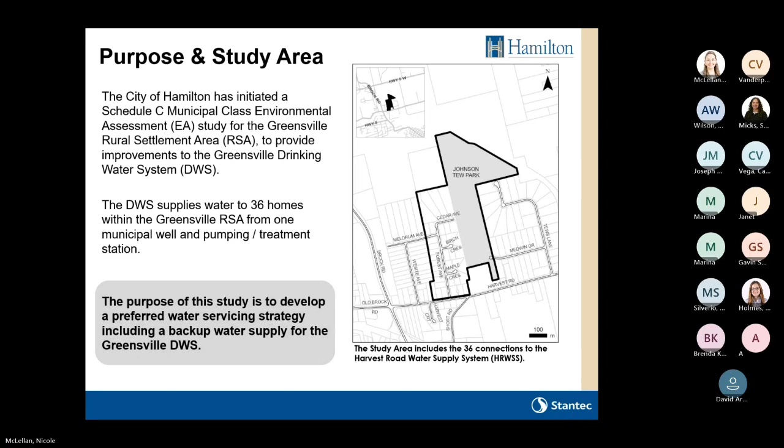The Municipal Class Environmental Assessment Study process frames the planning and implementation of municipal infrastructure and is legislated through the Ontario Environmental Assessment Act. This study is being conducted as a Schedule C project and will cover phases 1 through 4 of the EA process.

In phase 1 of the study, background planning and policy documents were reviewed, and the study area and problem and opportunity statement were developed. The project is currently in phase 2, where existing conditions have been detailed, alternatives have been identified and reviewed for their feasibility, and the recommended alternative solution has been identified, which will be presented today.

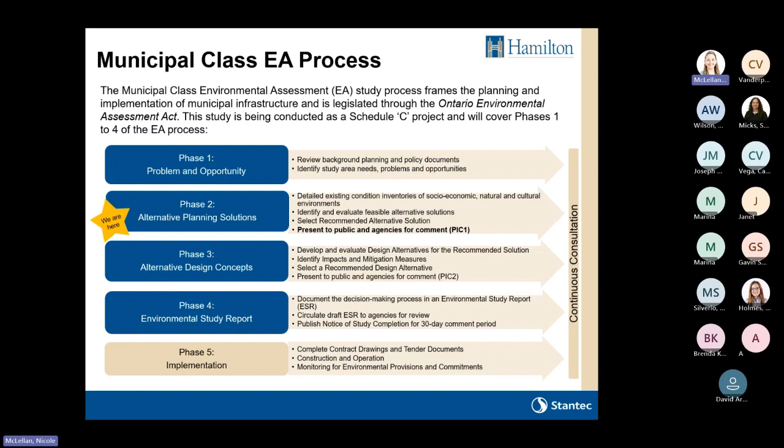Several previous studies have been completed and were used to inform this study. The Mid-Spencer Creek Greensville Rural Settlement Area Subwatershed Study was completed in 2016.

This study identified a management strategy for community servicing water and septic, recommending to maintain individual wells and septic systems on future lots, and to add a backup well to the existing supply well, FDG01, for the Greensville drinking water system. The location, sizing, and preliminary design of the treatment plant and storage tank would be subject to further assessment under a subsequent Schedule C Municipal Class EA.

Subsequently, a feasibility study was completed to identify potential backup well alternatives and explore cost implications associated with the 2016 subwatershed study recommendations. The feasibility study was initiated as a Schedule C Municipal Class EA. However, due to the identification of aging infrastructure at FDG01 and additional alternatives being identified, the EA was transitioned into a feasibility study.

The recommendation from the feasibility study was to implement a single well supply, or new well supply, with one fenced wellhead in Johnson Tew Park, installation of a well pump, transmission line, pumping control, and treatment building at the end of Cedar Avenue.

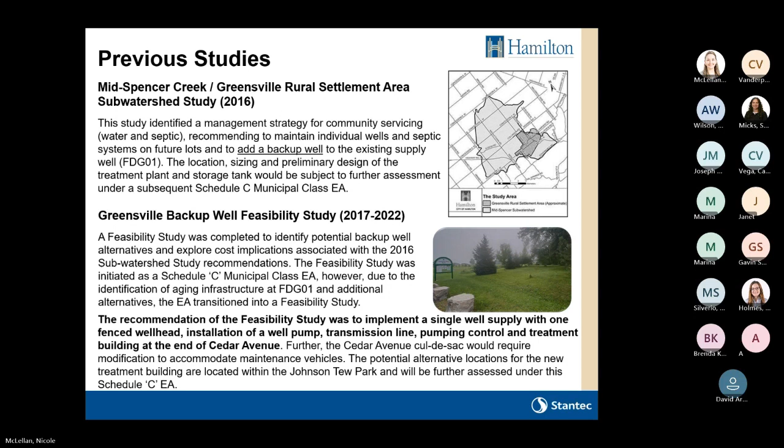In 2019, the city received a condition assessment for the existing FDG01 well site, which identified deficiencies and areas of concern for the Greensville drinking water system assets, including power and building electrical, process equipment corrosion, and some site civil and structural assets in need of replacement and maintenance.

The condition of the facility overall was scored as good on average, and the facility average risks were considered medium. The critical risks included pressure tanks 1 to 4 and the well pump. Other high-risk components included UV reactors, valving, piping, well pump motor, and the starter.

In 2022, an evaluation of the constructability and risks associated with alternative supply scenarios for the Greensville drinking water system was completed, along with a multi-objective decision analysis and cost estimates. The alternatives reviewed in this study included alternatives to a backup well for emergency supply.

Those included trucked water connection and an on-site reservoir with one-day storage. Upgrades to well FDG01 per the condition assessment were estimated to require 8 months of backup trucked water supply, among other limitations.

This review indicated the preferred alternative supply scenario would be a new treatment building for a new wellhead, which would be known as FDG02, as the primary supply for Greensville, and decommissioning FDG01. The investment into FDG02 would result in a more reliable facility for the community and city operations for the long term at an accessible site.

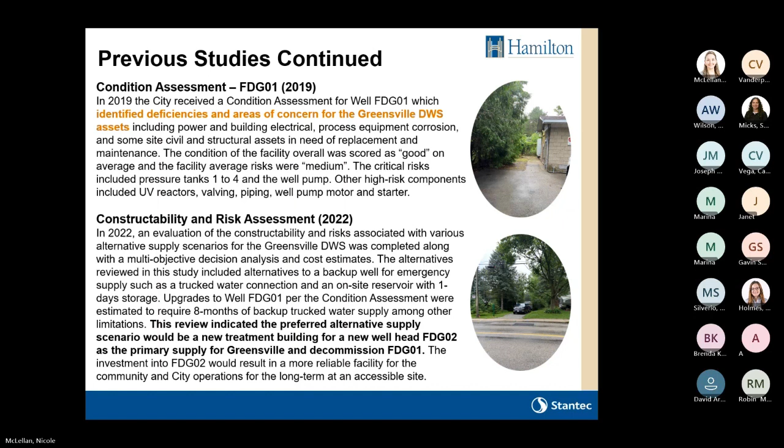Additionally, the following studies have been completed to document the existing conditions within the Greensville drinking water system. For built heritage resources and cultural landscapes, the study area contains residences over 40 years of age and municipal plaques. It was confirmed that the residences are not considered to be built heritage resources.

The 2 plaques located in the north part of Johnson Tew Park are not expected to be impacted by the construction activities, and if they need to be removed, they can be replaced.

For the archaeological assessment, a Stage 3 archaeological assessment was carried out in 2014 and indicated that the proposed area for the new treatment building in the park at the end of Cedar Avenue does not present archaeological concerns. There are no other anticipated impacts to archaeological resources from the project alternatives.

For natural environment, significant woodlands are present within the Greensville rural settlement area, though they are not present within the study area. Bobolink and eastern meadowlark have been identified within the park.

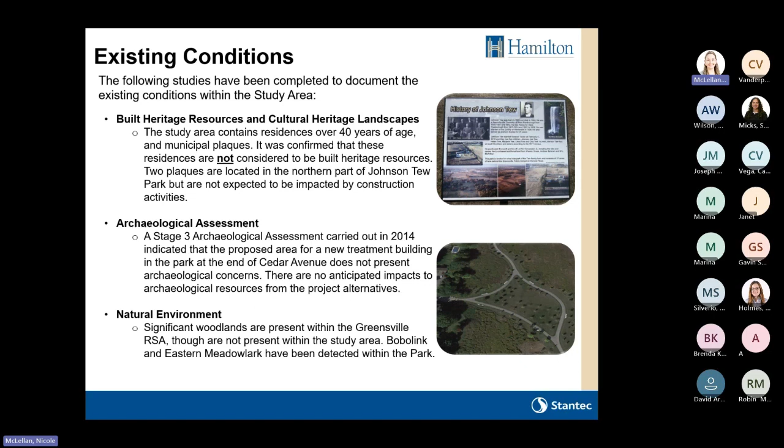The Greensville drinking water system is supplied drinking water from one well, identified as FDG01. Information about the existing water supply is provided here. The system was constructed in 1975 and provides water to 36 homes. All residences in the area are on individual septic systems.

FDG01 is located near the intersection of Harvest Road and Forest Avenue between two existing residential properties. The lot has minimal buffer around the well house. Access to the well house is restricted to a narrow driveway with overhead electrical wires.

The municipal drinking water license for FDG01 stipulates a daily rated capacity of 199 cubic meters per day and a permit to take water daily rated capacity of 197 cubic meters per day. During 2021 to 2022, the average daily flow was 33.2 cubic meters per day, and the maximum day demand was 93.4 cubic meters per day.

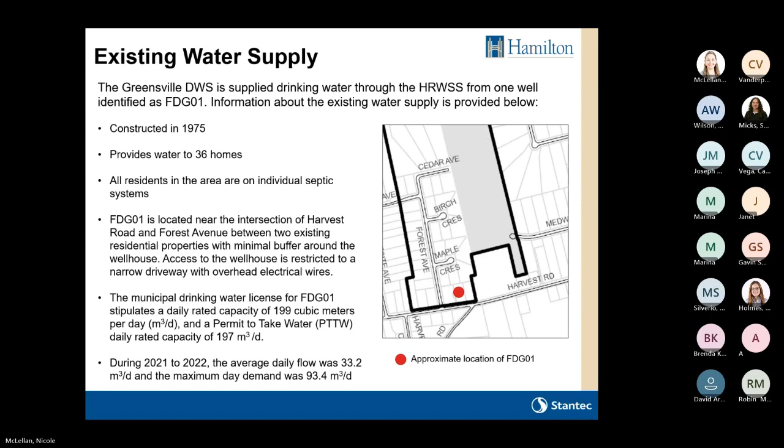The problem and opportunity statement for this study is as follows: The Greensville drinking water system is serviced by one groundwater source municipal communal well system, which is not equipped with backup water supply, and several components of the existing system are reaching end of life. FDG01 is operating safely and effectively, however, it does not meet the city's current outstation design manual.

In 2022, the city completed a constructability and risk assessment study, which identified alternatives for backup water supply and identified that the implementation of a new municipal communal well and treatment building with water storage could provide reliable water supply and quality to the Greensville drinking water system and meet the city's water outstation design manual criteria. The city is committed to providing safe and reliable drinking water to the Greensville rural settlement area residences and will evaluate alternative servicing scenarios with backup water supply for the Greensville drinking water system.

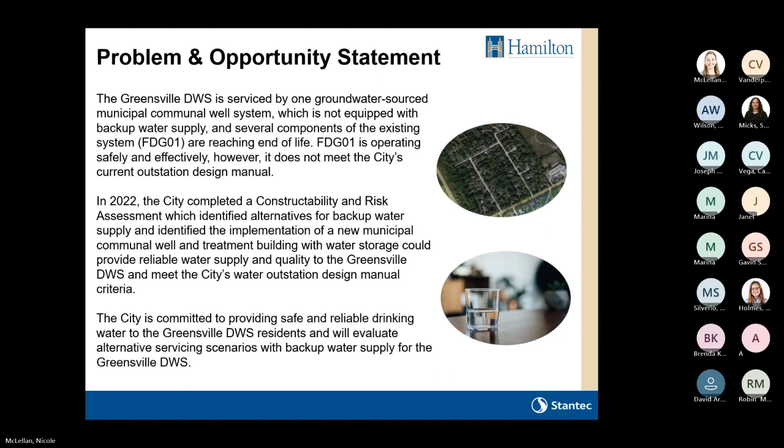The city's Source Water Protection Group has spent considerable effort identifying and validating alternative well supplies and water quality for the Greensville drinking water system.

Several test wells have been explored in Johnson Tew Park as potential alternative well supplies for the Greensville drinking water system. The city completed a 72-hour pump test on test well 2-13 in 2023 to confirm the reliability of supply from this alternative well in the study area.

Test well 2-13 has been found to be the most promising alternative supply. It's expected to meet the Greensville drinking water system demands and has an expected long-term water taking rate of 129.6 cubic meters per day. It doesn't have any water quality exceedances.

However, test well 1-13 and test well 3-13 have not been identified as viable sources due to having inadequate water supply and water quality issues.

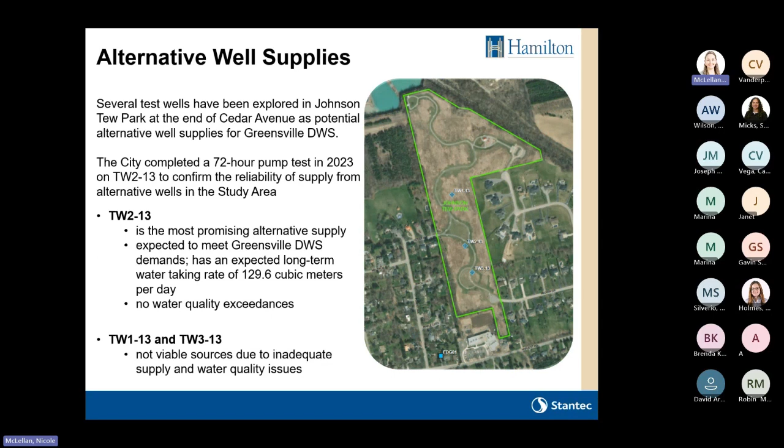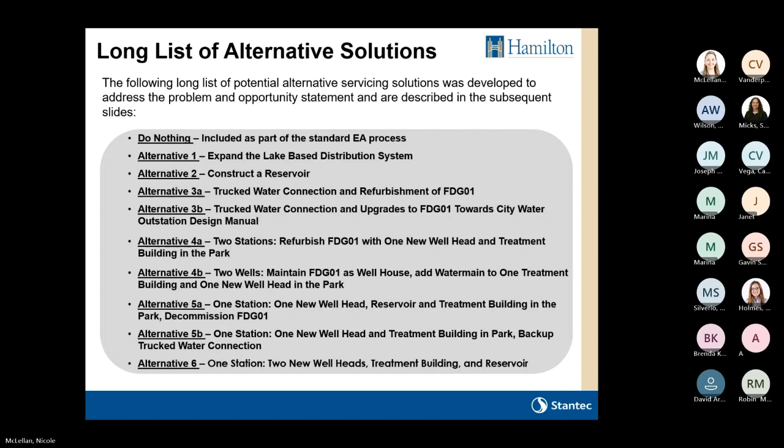The do nothing alternative was included as part of the standard EA process for comparison purposes only.

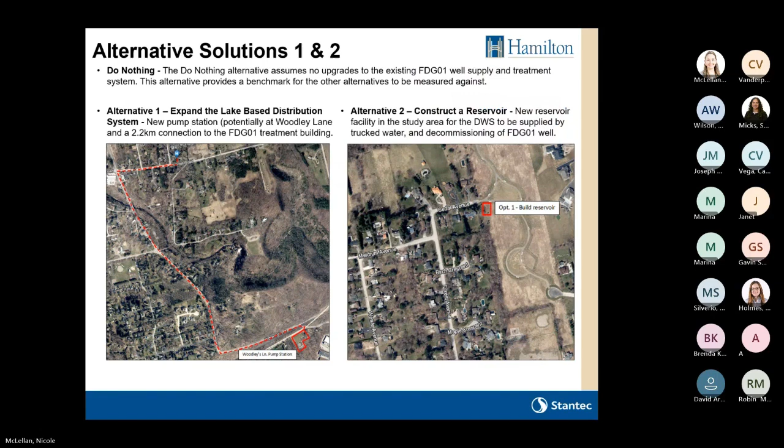Alternative 3 involves a backup trucked water connection to improve the reliability of supply for Greensville. 3A would involve the refurbishment of the existing FDG01 site per the condition assessment needs previously identified, as well as the addition of a trucked water connection, likely at Cedar Avenue, as the space constraints on the access driveway to FDG01 are significant, so it wouldn't be able to accommodate trucked water as well as maintenance practices.

3B would involve additional upgrades to FDG01 to meet the city's water outstation design manual where feasible. The main issue with upgrading and maintaining FDG01 is that this work would be expected to require an approximate 8-month construction period where the community would need to be supplied by trucked water for that entire duration, which does introduce additional nuisance, operational concerns, and costs.

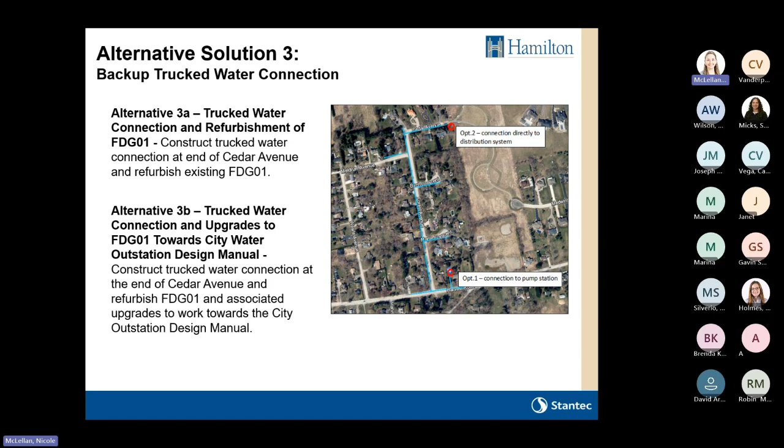Alternative 4 involves maintaining and upgrading FDG01 and adding an additional backup well supply to the drinking water system, resulting in a total of 2 well supplies for the community. This would result in 2 properties being maintained for the overall system.

In Alternative 4A, the new wellhead and treatment building would be added in the park to the existing system, and then the FDG01 station would be refurbished. This alternative would result in 2 pump stations and treatment buildings maintained for the Greensville drinking water system long-term.

In Alternative 4B, the pumping and treatment equipment at the existing FDG01 would be decommissioned, and a water main would be added along Forest Avenue up to the new pump station and treatment building in the park to connect FDG01 to FDG02. This alternative would require significant road construction through the community to construct the new water main, but it would result in 2 well supplies and 1 pump station and treatment building.

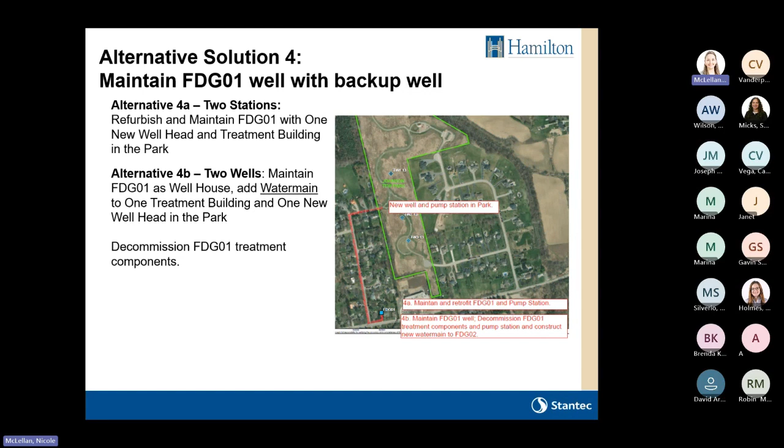Alternative 5 involves decommissioning the existing FDG01 station and converting the primary supply for the Greensville drinking water system to a new well and pump station building in the park to be known as FDG02. The difference between Alternative 5A and 5B is the primary approach for backup water supply.

5A would involve constructing an underground reservoir with 1-day storage to improve the reliability of the system. 5B would involve backup water supply provided by a trucked water connection to the new well supply. It should be noted that during detailed design, option 5A could also have further system redundancy built in by adding a trucked water connection to that system as well.

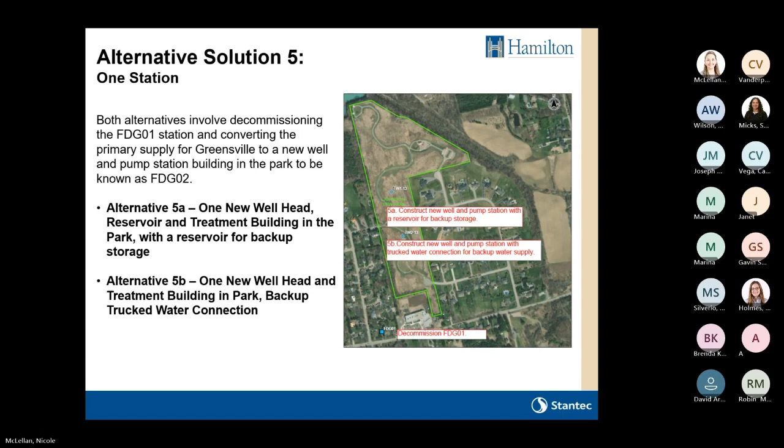Alternative 6 involves decommissioning FDG01 well and facility and constructing 2 new wellheads and 1 treatment building in the park with an underground storage reservoir. This alternative could also include a trucked water connection to the system for additional redundancy during detailed design.

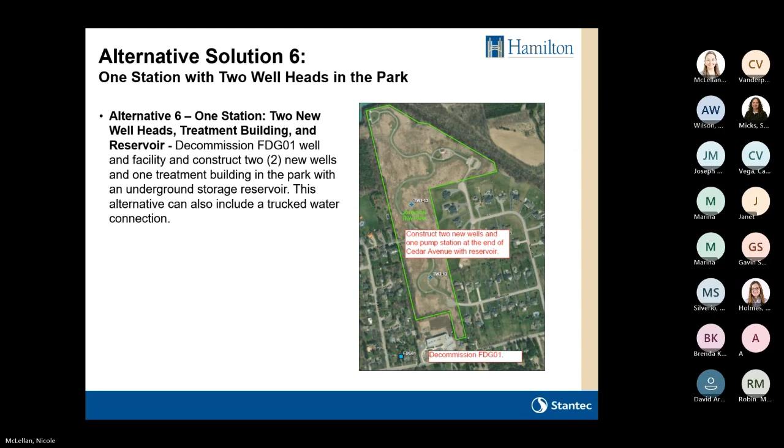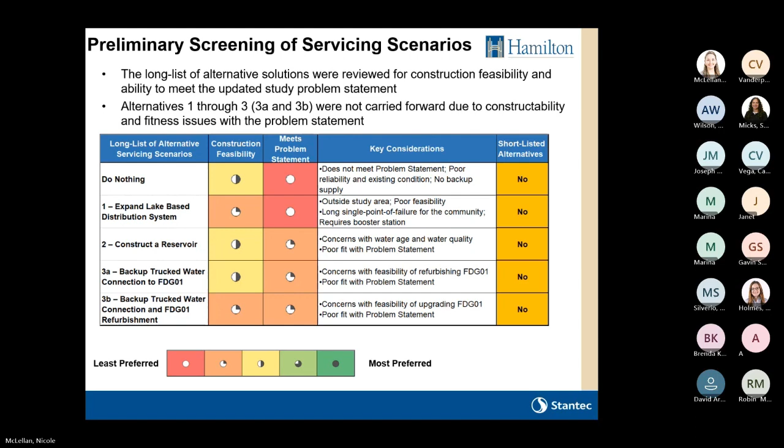Alternatives that were preferred following this preliminary screening were carried forward for a review against the study evaluation criteria. These included Alternative 4A, with maintaining FDG01 well, pump station, and treatment building, and adding a new well and pump station in the park; Alternative 5A, involving decommissioning FDG01 and constructing a new wellhead and pump station in the park with an underground reservoir; and Alternative 6, involving decommissioning FDG01 and constructing 2 new wells and 1 pump station in the park with an underground reservoir.

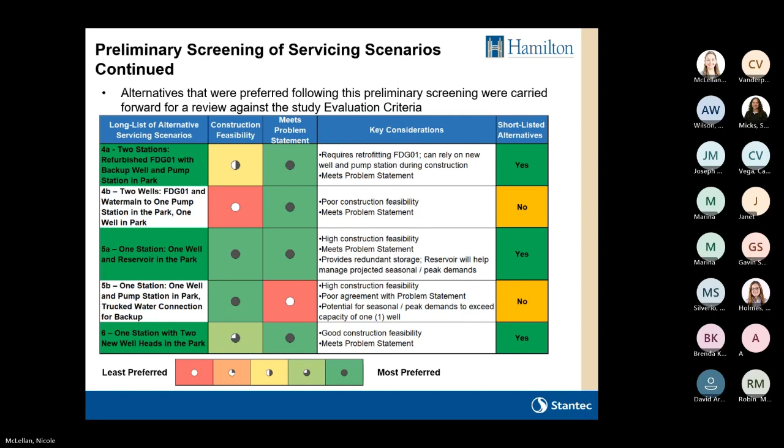The shortlisted alternative solutions were evaluated using the factors and criteria listed here to identify the recommended servicing solution. Comments received from agencies, stakeholders, Indigenous communities, and members of the public will be integrated into this evaluation as required.

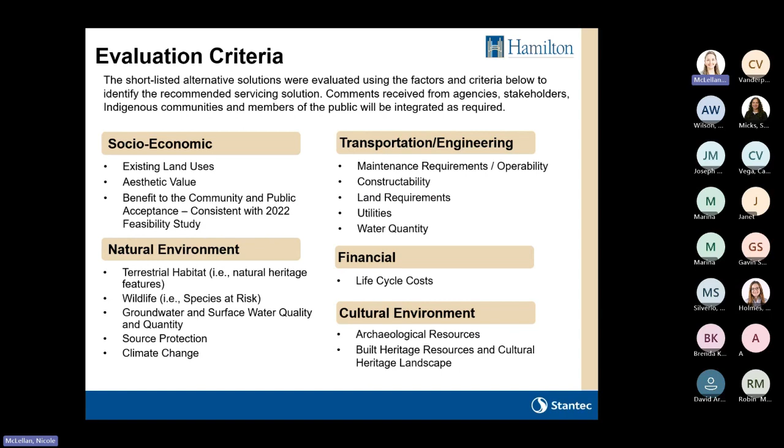The short list of alternative servicing solutions was reviewed against the evaluation criteria, and the recommended alternative servicing solution was identified to be Alternative 5A, with 1 new wellhead, a treatment building, and a buried reservoir in the park, and decommissioning the existing FDG01 well, pump station, and treatment building. Alternative 5A was found to be the most preferred with respect to natural environment features, technical engineering considerations, and financial aspects, including capital and long-term maintenance and operational costs.

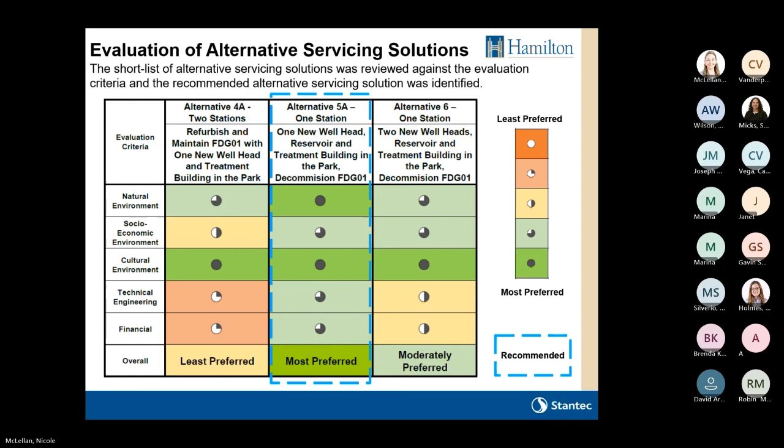In addition to alternative servicing solutions, alternative locations for a new treatment building were also reviewed for this study. The figure shows the approximate locations considered for the alternative pump house. These include alternative location 1, to the south of the park path entrance at the end of Cedar Avenue. This lot is identified and secured by the city, and it is proximal to the alternative well supply test well 2-13.

The second alternative location is to the north of the park path entrance at the end of Cedar Avenue. This location would require consultation with parks, and it is further away from the well supply, test well 2-13. It should be noted that other locations within the park were not evaluated as part of this study due to access constraints and proximity to natural resources or trees.

The new pump station will require a total excavation area of approximately 1,400 meters squared, a facility building and parking area of approximately 900 meters squared, or 30 meters by 30 meters, and a well house structure of approximately 70 meters squared, or 10 meters by 7 meters, and a buried reservoir for which sizing is to be further defined during the next design concept stages of this project.

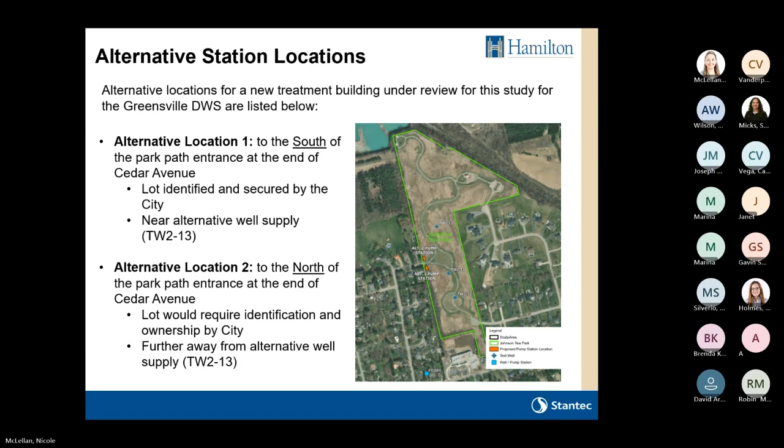The two alternative station locations in the park were evaluated also against the evaluation criteria. At the time of this evaluation, the most preferred location for the pump station in the park is to the north of the park path entrance at the end of Cedar Avenue. This would require a longer water main from test well 2-13 wellhead to the new pump station in the park. There is an existing tree line along the north edge of the park that would be expected to provide an appealing aesthetic to conceal the new pump station. Otherwise, the two sites have similar considerations in terms of technical access, maintenance considerations, and long-term operations and maintenance costs.

During the next phases of the project, the city will be gathering comments on these identified preferred recommendations and reviewing in detail the feasibility, and particularly with parks, the specific and preferred location of the pump station.

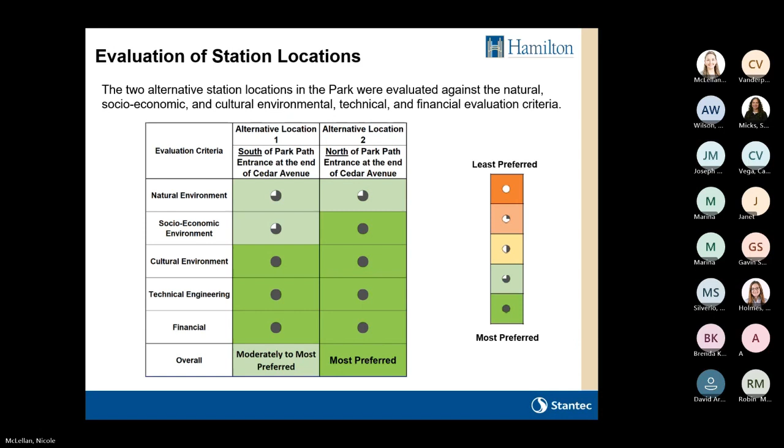Following this PIC, the project team will complete the next steps identified below: review and respond to comments received, continue to engage Indigenous communities and consult with the public and agencies, confirm the preferred water servicing strategy and location, confirm the preferred water servicing strategy design, and complete technical studies. The results of these next steps will be used to identify the preferred water servicing strategy, which will be presented at Public Information Center number 2, tentatively scheduled for winter 2024.